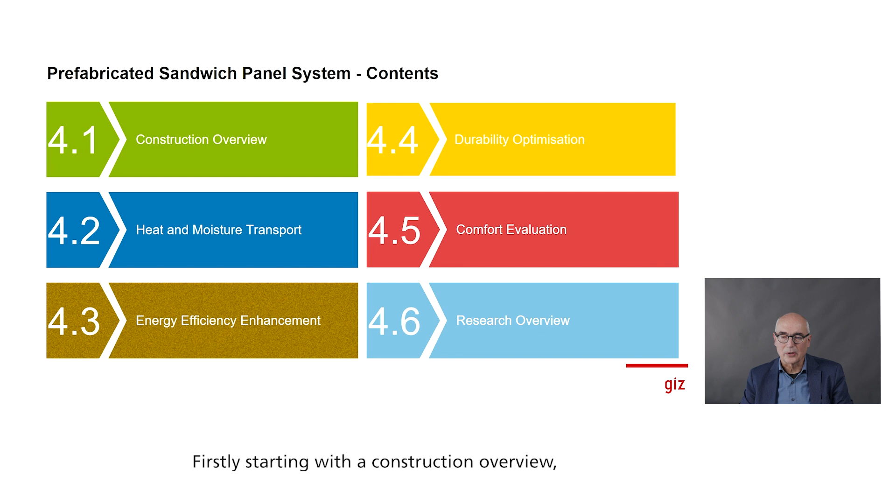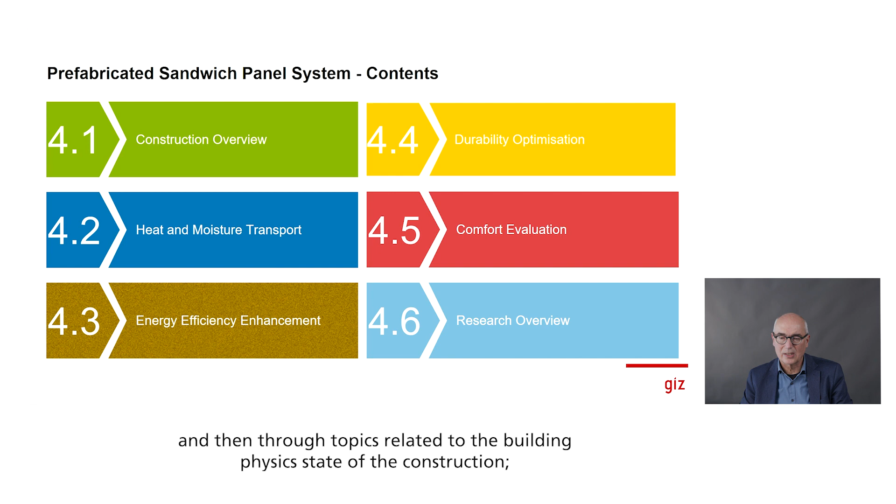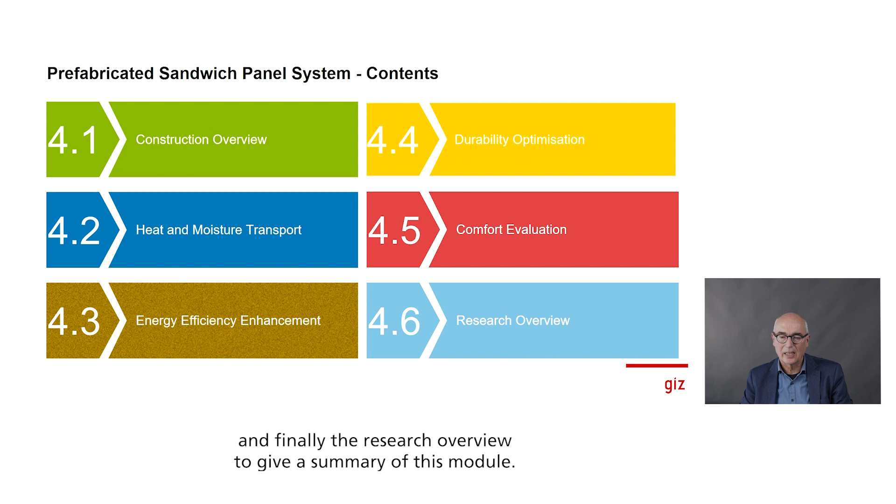Starting with the construction overview to create an understanding of the specific building method being used, and then through topics related to the building physics state of the construction, including heat and moisture transport mechanism, energy efficiency, durability, thermal comfort, and finally the research overview to give a summary of this module.

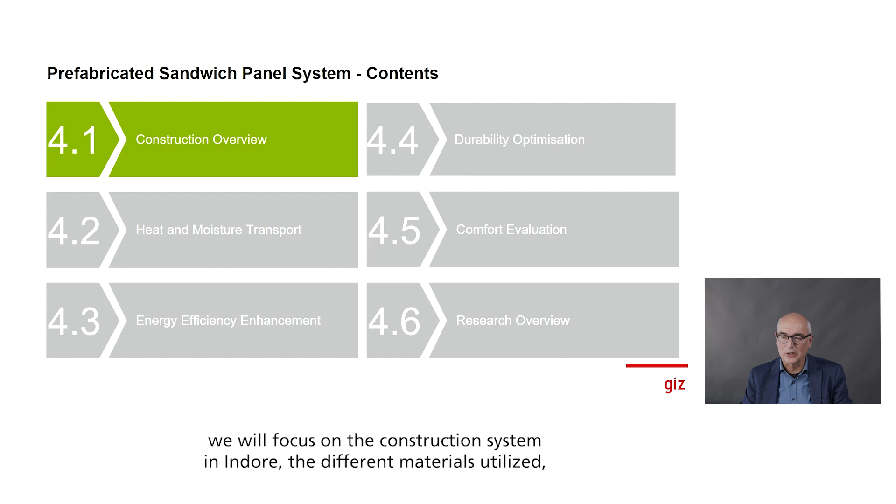As mentioned in the first unit, we will focus on the construction system in INDORE, the different materials utilized, and the construction procedures. We will then explore the building physics challenges that might arise from this type of construction.

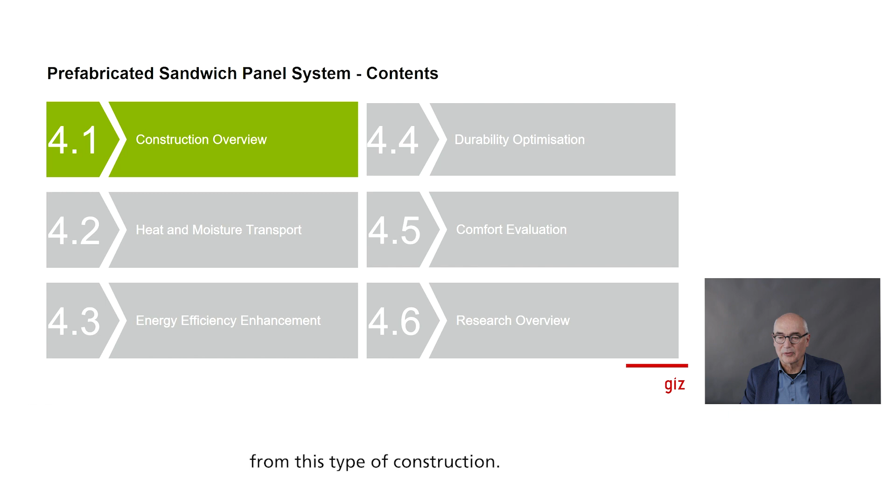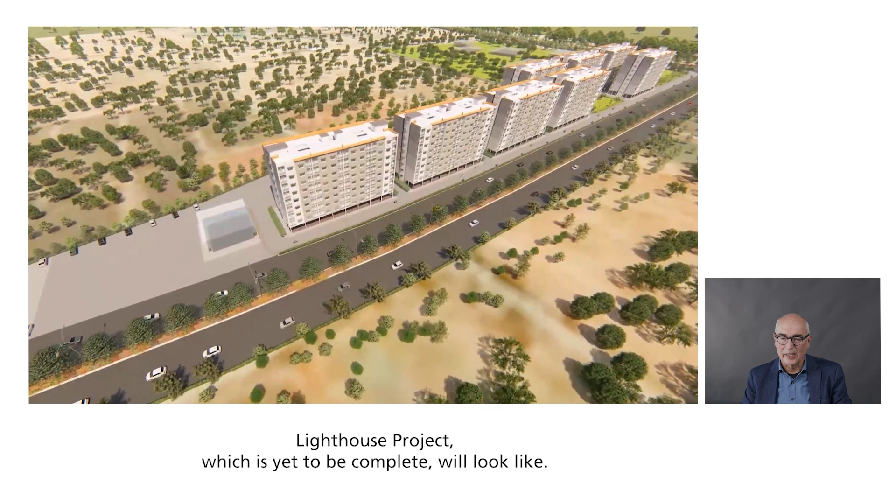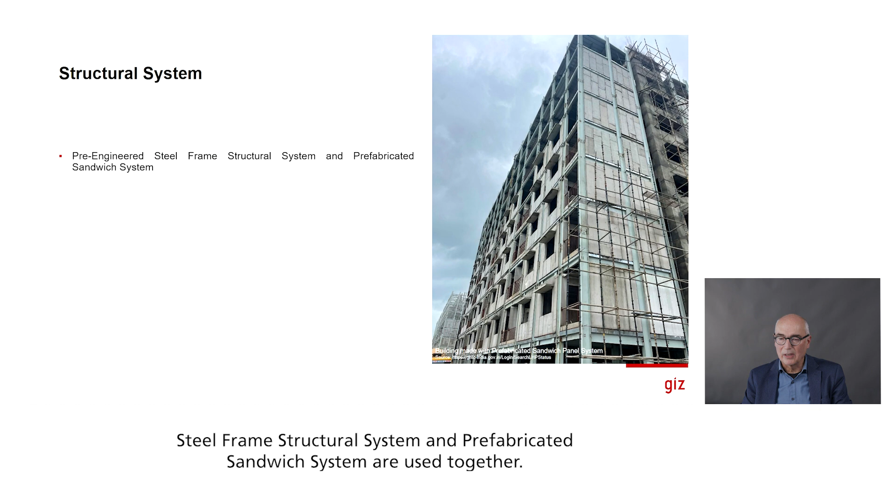This rendering video shows us what INDORE's lighthouse project, which is yet to be complete, will look like. The project is set to contain a total of 1024 flats. The lighthouse project in INDORE utilizes a hybrid structural system where a pre-engineered steel frame structural system and prefabricated sandwich system are used together.

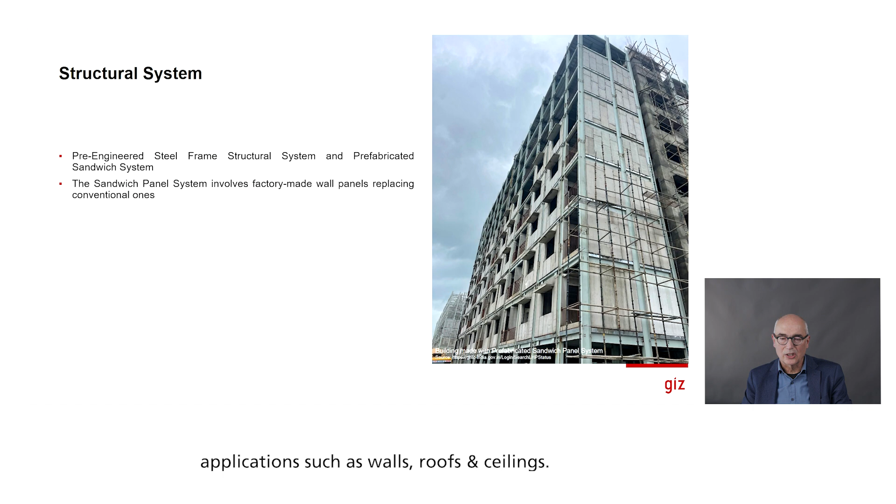The prefabricated sandwich system, as the name suggests, is a system of panels which are manufactured in a factory and can have several applications such as walls, roofs and ceilings. In the INDORE project they are used as a walling system.

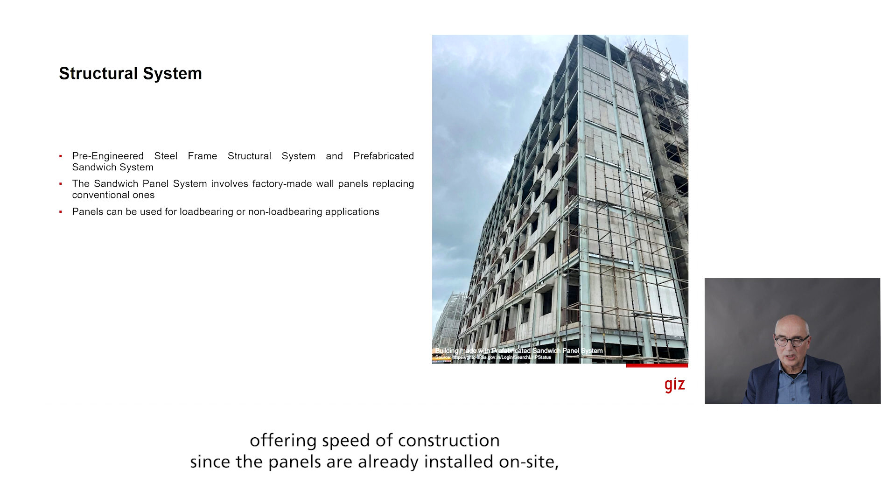This system provides many benefits, offering speed of construction since the panels are already installed on site, as well as water conservation, as no curing of wall components is required.

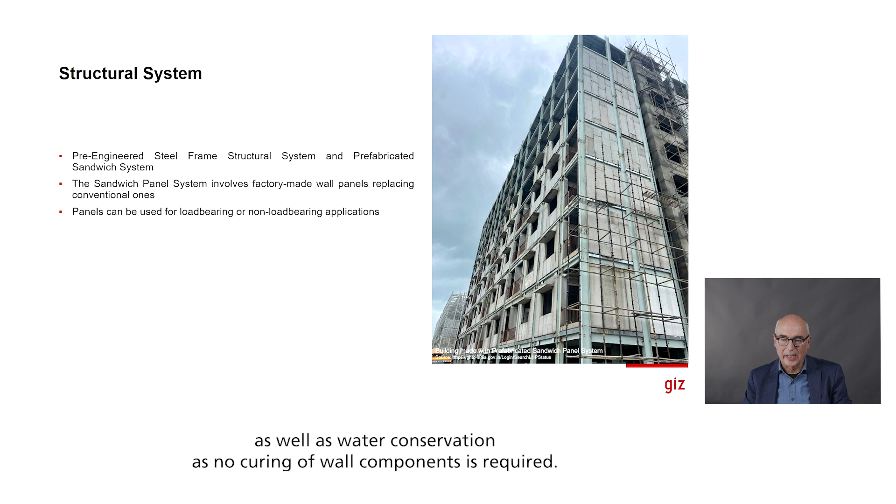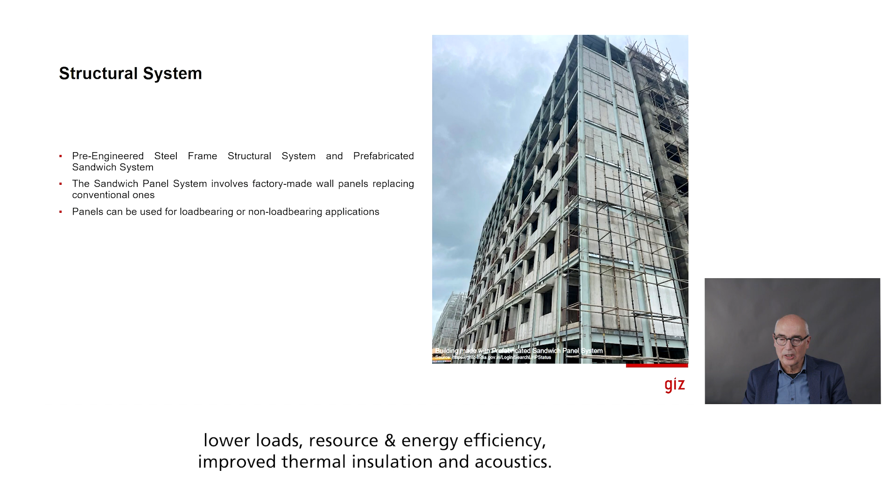A lightweight core material is used in the manufacturing of the panels, providing lower loads, resource and energy efficiency, improved thermal insulation and acoustics. To give a brief introduction of the construction process in this lighthouse project in INDORE, it...

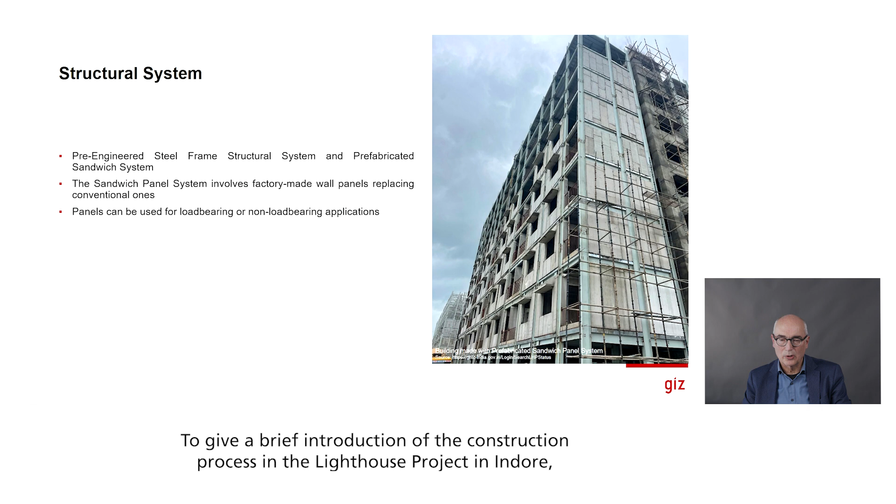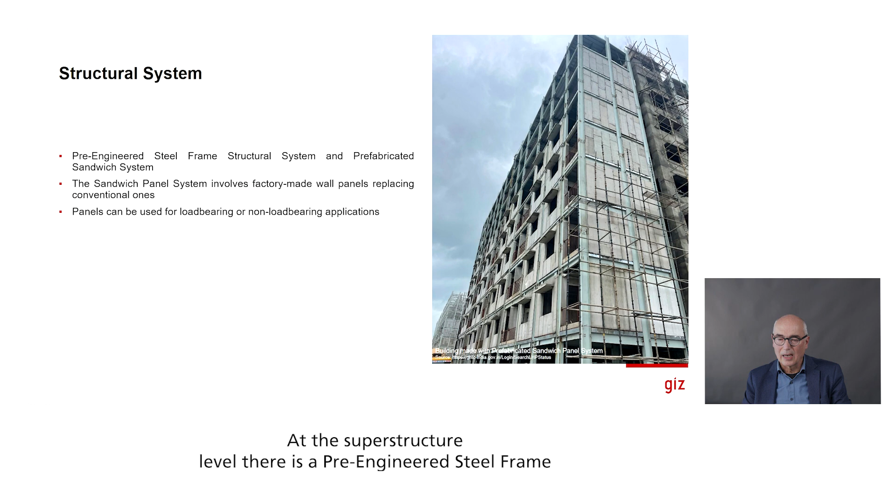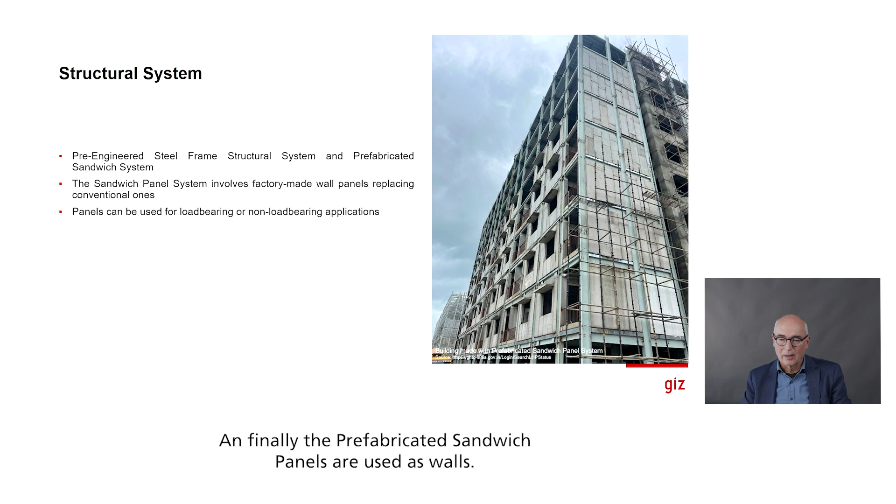involves the use of combined and isolated footings at the substructure level. At the superstructure level there is a pre-engineered steel frame and deck sheets for casting floor roof slabs being used. And finally, the prefabricated sandwich panels are used as walls. The steel frame and the prefabricated wall panels can be seen in this picture.

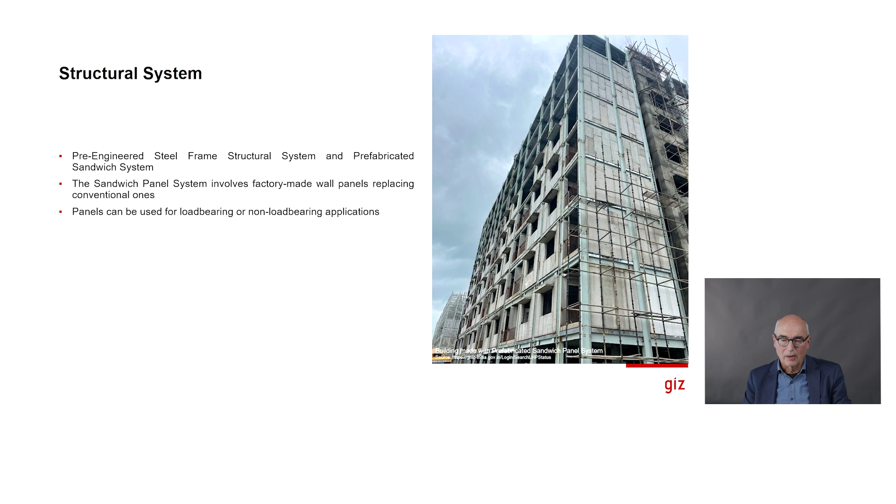The construction procedure will now be explained in detail.

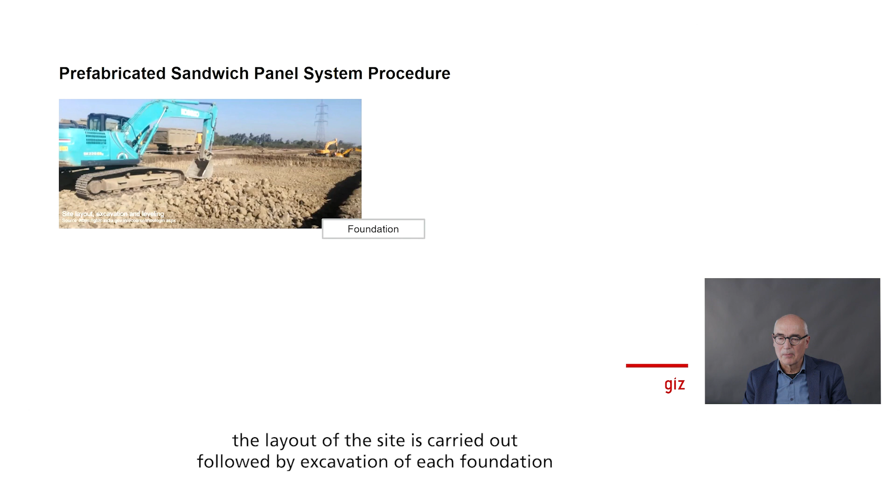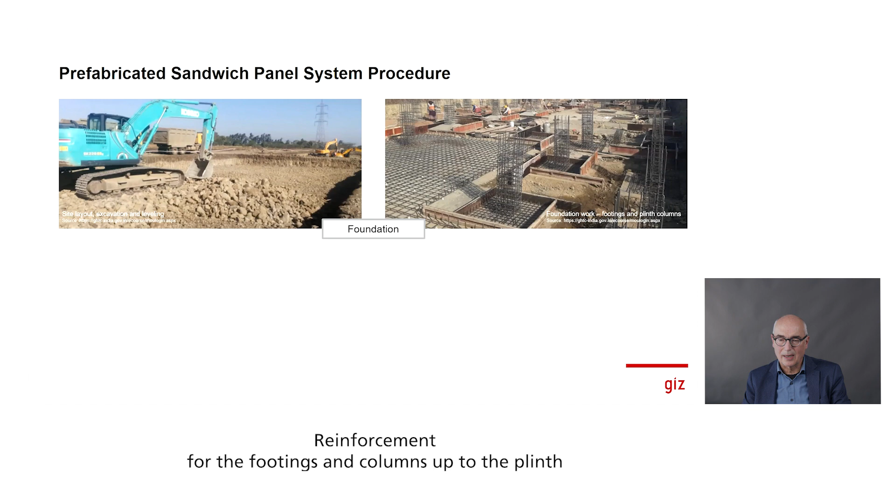Looking at the construction procedure and starting with the substructure. The layout of the site is carried out followed by excavation of each foundation block and leveling by laying plain cement concrete. Reinforcement for the footings and columns up to the plinth level are then placed, after which concreting is...

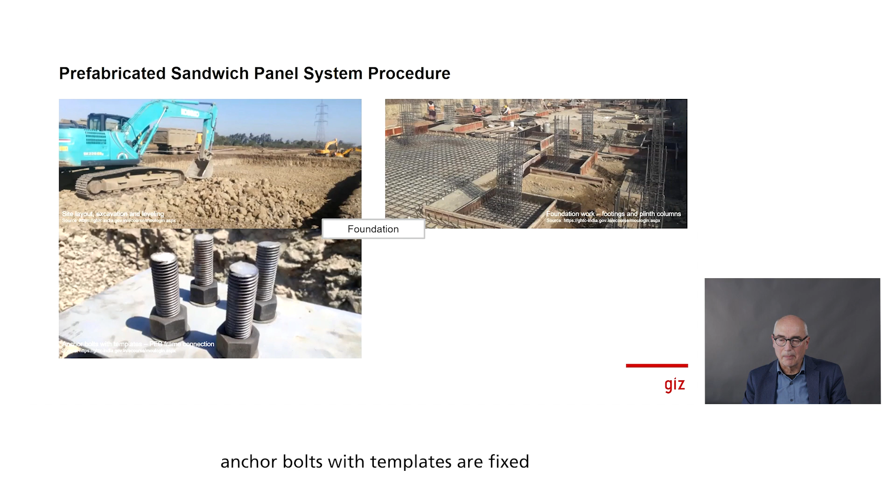carried out. This is followed by backfilling up the plinth, and as can be seen in the picture below, anchor bolts with templates are fixed over the reinforcement of the foundation columns in preparation for the steel frame as it is erected over the plates.

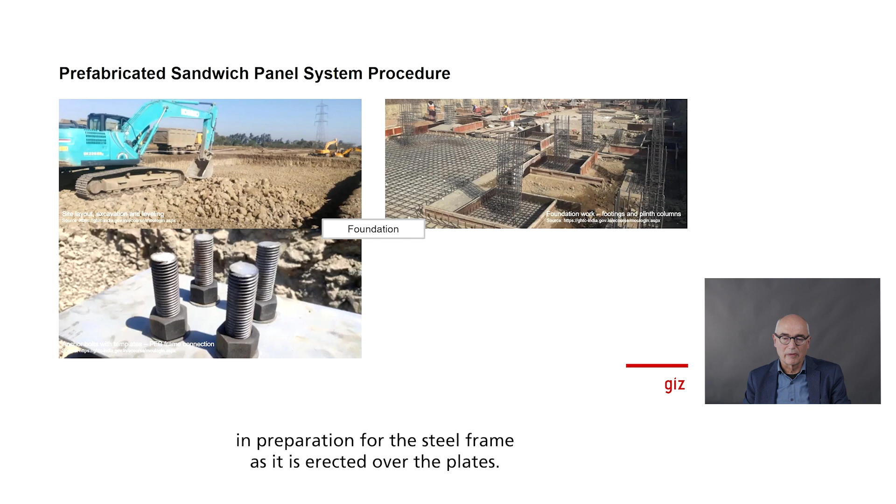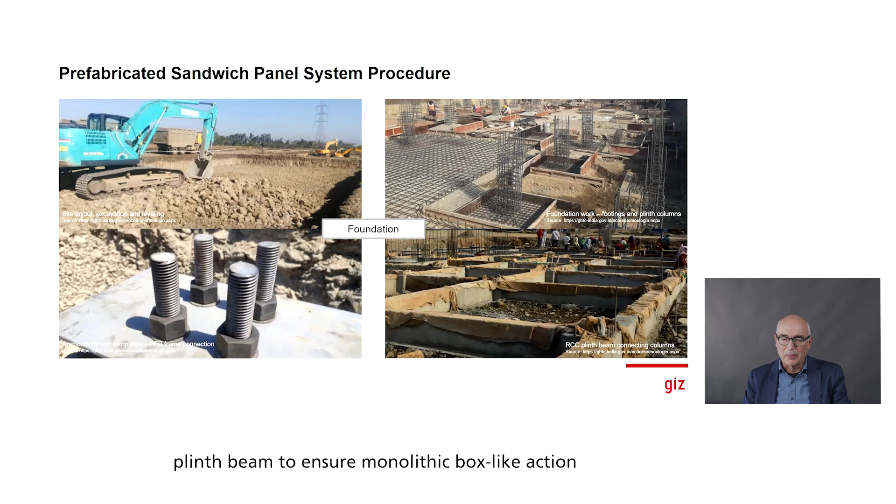Finally, the foundation columns are connected by a reinforced cement concrete plinth beam to ensure monolithic box-like action and seismic resistance.

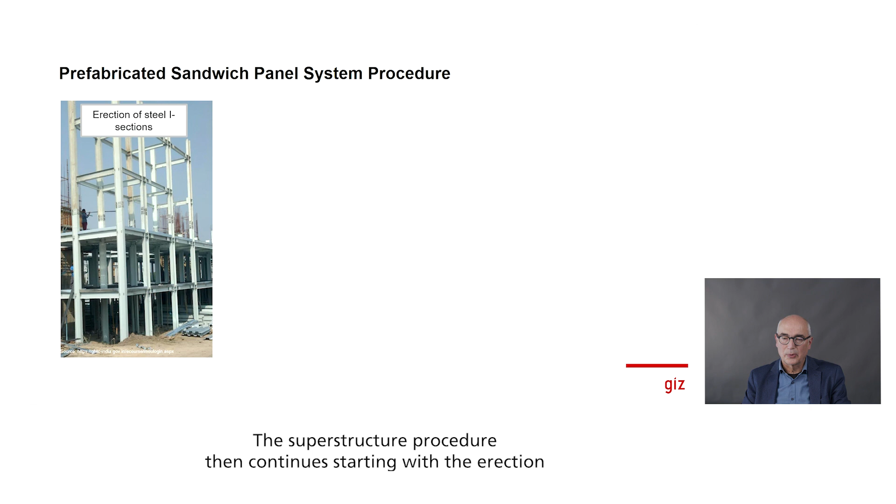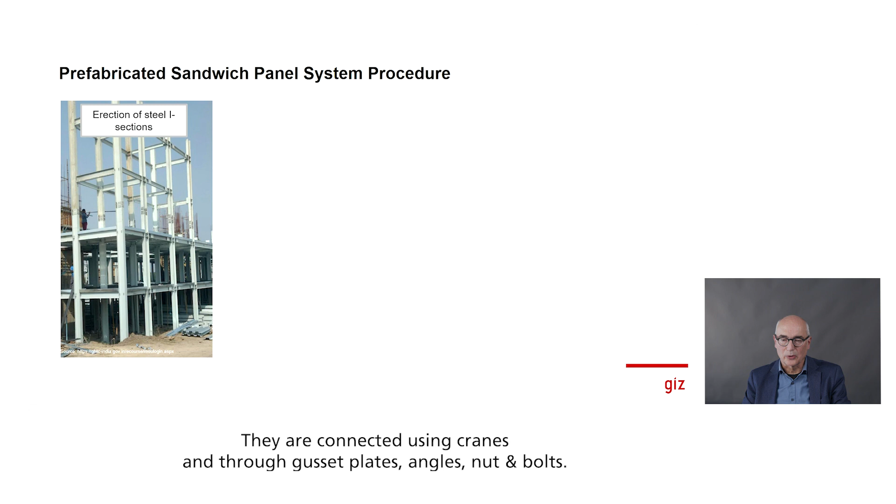The superstructure procedure then continues, starting with the erection of the pre-engineered building system made up of I sections. They are connected using cranes and through gusset plates, angles, nut and bolts.

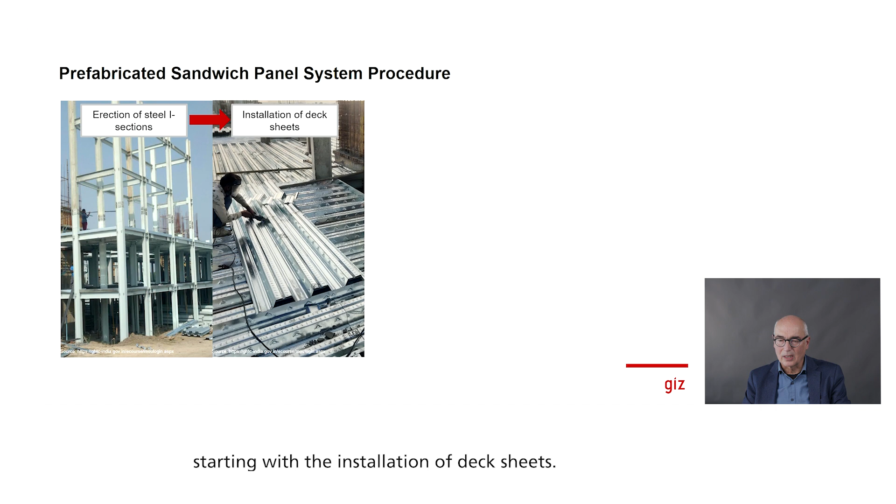Once the frame is set up, the process of deck slabs begins, starting with the installation of deck sheets. This is followed by reinforcement being laid on the sheets and concreting to form the slabs.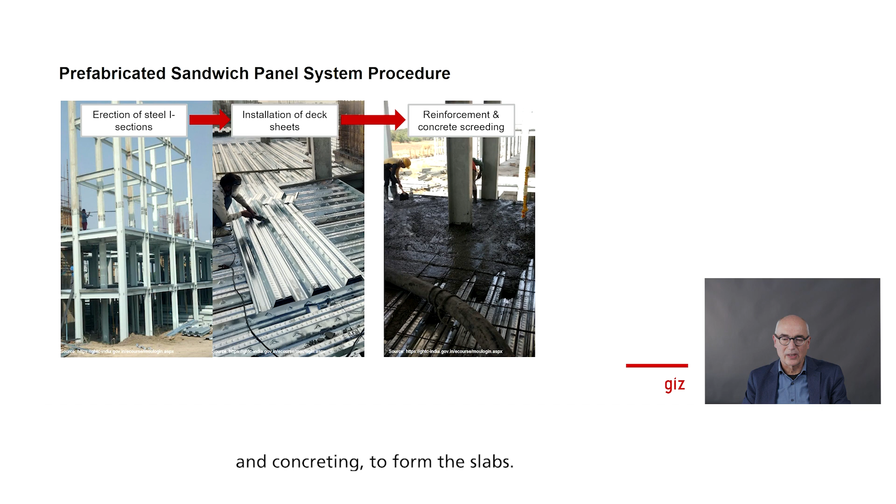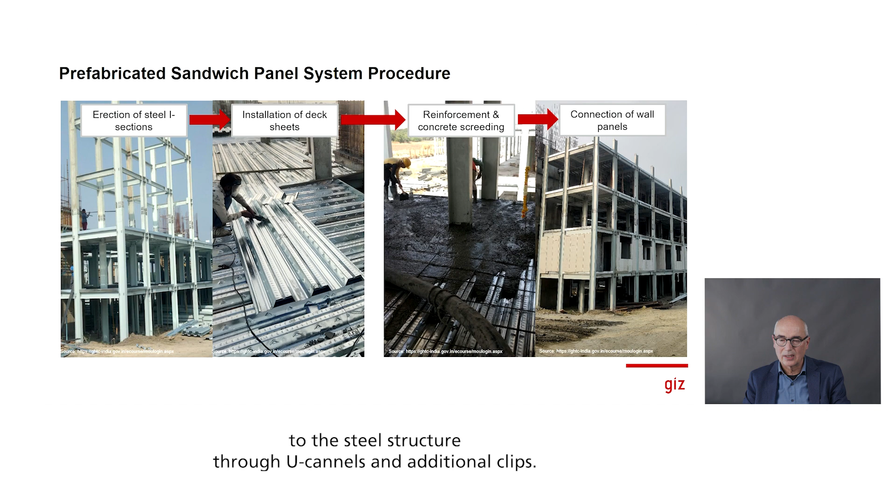Finally, the factory-made wall panels are installed and connected to the steel structure through U-channels and additional clips.

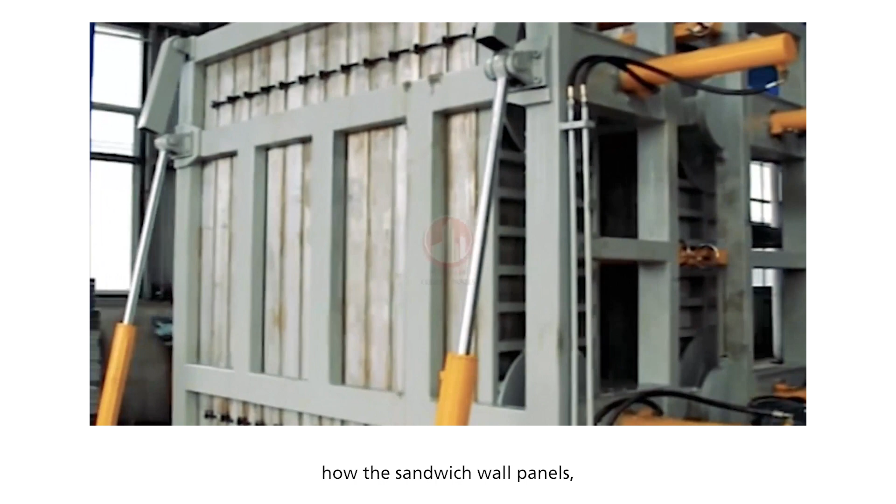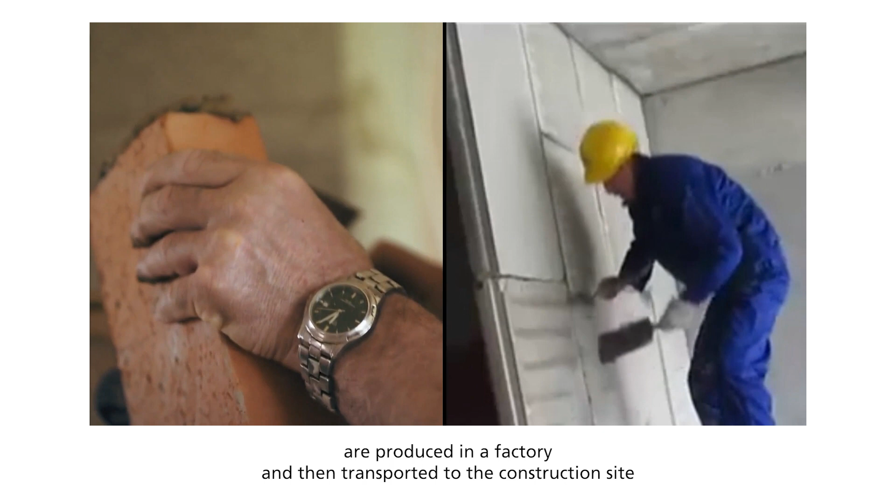In this video we can see how the sandwich panels, which are made of expanded polystyrene cement, are produced in a factory and then transported to the construction site ready for use.

They replace conventional brick and mortar walls and can be used for load-bearing and non-load-bearing applications.

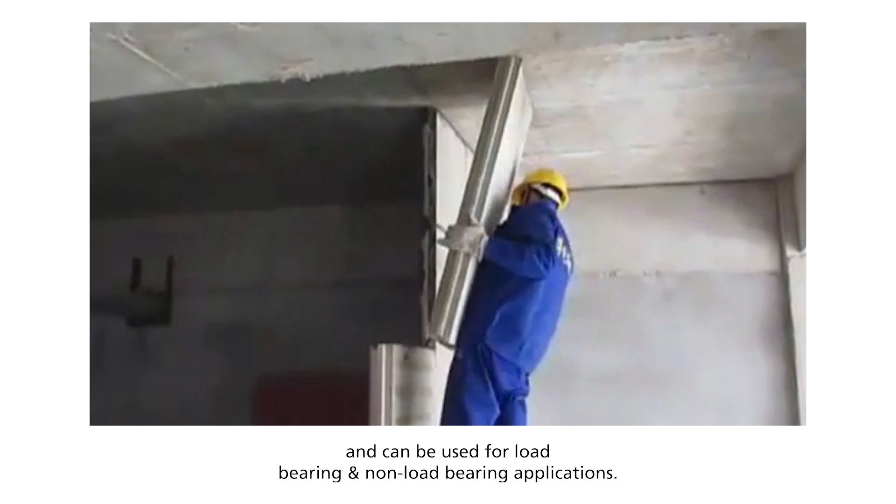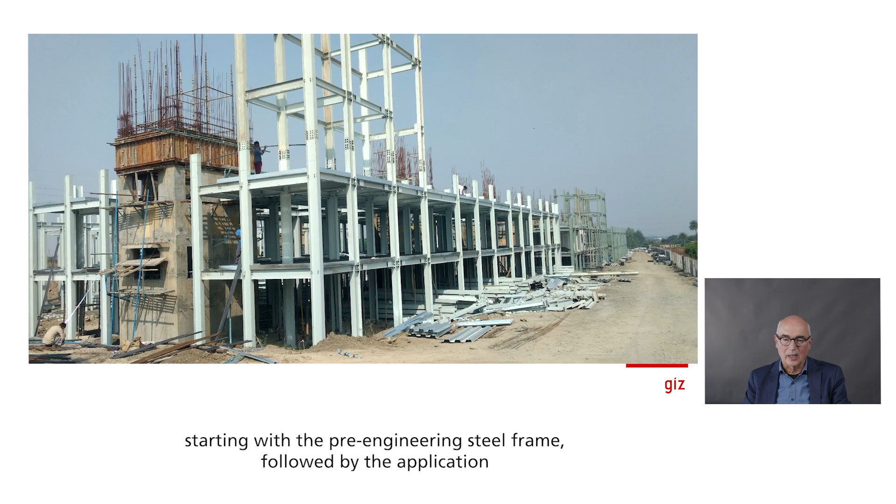In these pictures we can see the development of one of the towers at INDORE, starting with the pre-engineering steel frame, followed by the applications of the building. Here we have a picture showing the floor plan of the INDORE units and pictures from a built unit.

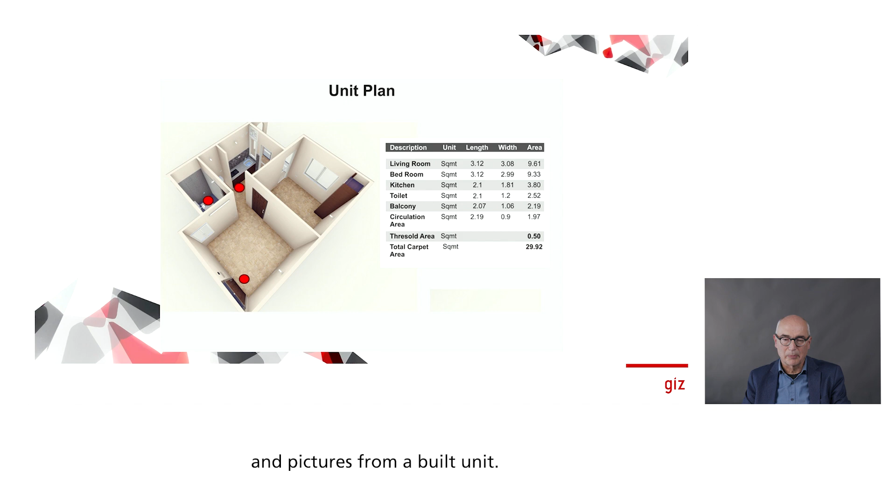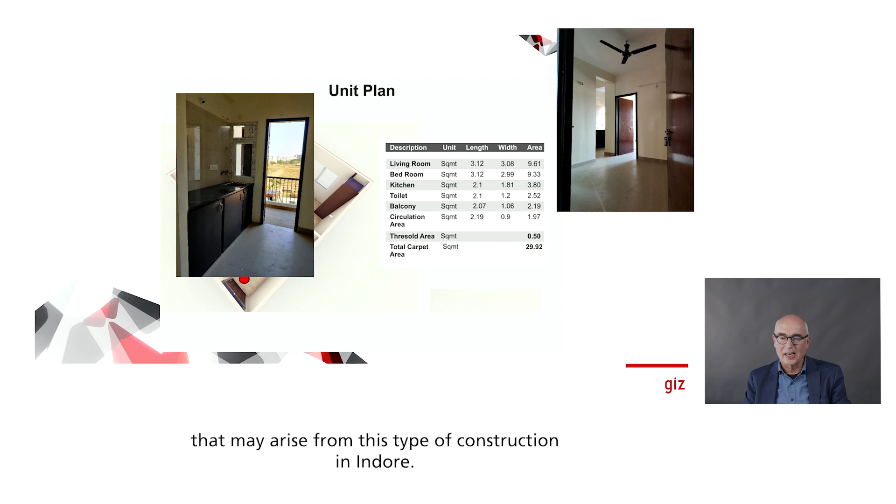We will now briefly explore the building physics challenges that may arise from this type of construction in INDORE.

The construction challenges that exist in INDORE are manifold. Whether it is the evaluation of materials and their physical properties, whether it is the construction method itself, whether it is the climatic conditions in INDORE.

They all have an impact on the heat and moisture transport, on energy efficiency, on durability, or on comfort conditions in these apartments. Within the following submodule, we will address some of these issues and you will learn how to cope with the most pressing of these issues.

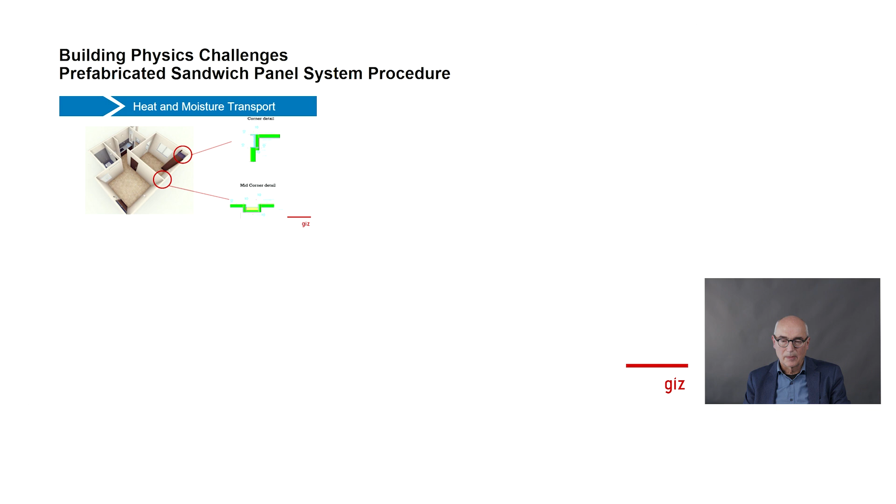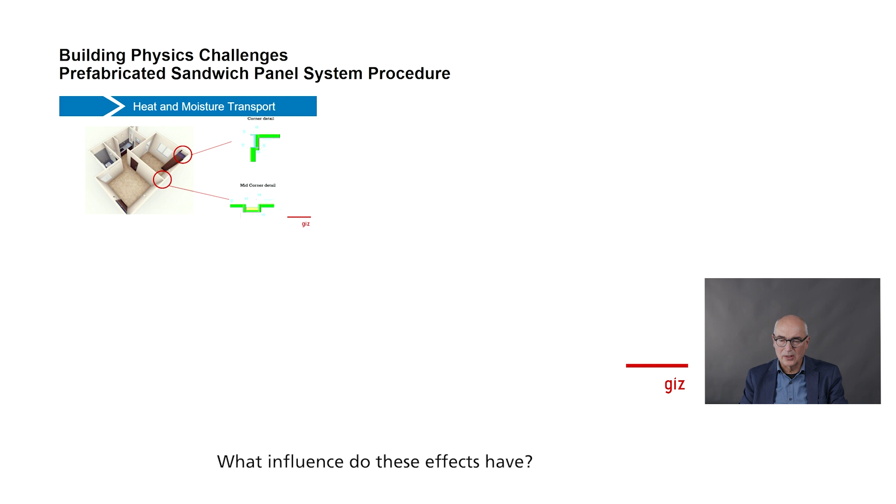In the second lecture, you will learn something about the heat and moisture transport. We will have to take a deeper look at the ventilation calculation and the heat bridge calculation. What influence do these effects have? What happens with the heat transfer and how air infiltrates a building? Since we have material with quite low heat conductivity, we will see the influence of heat bridges and ventilation.

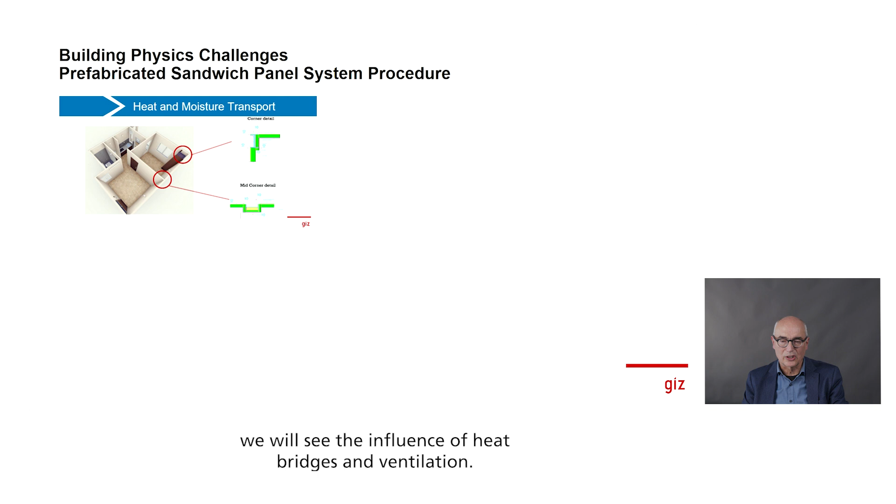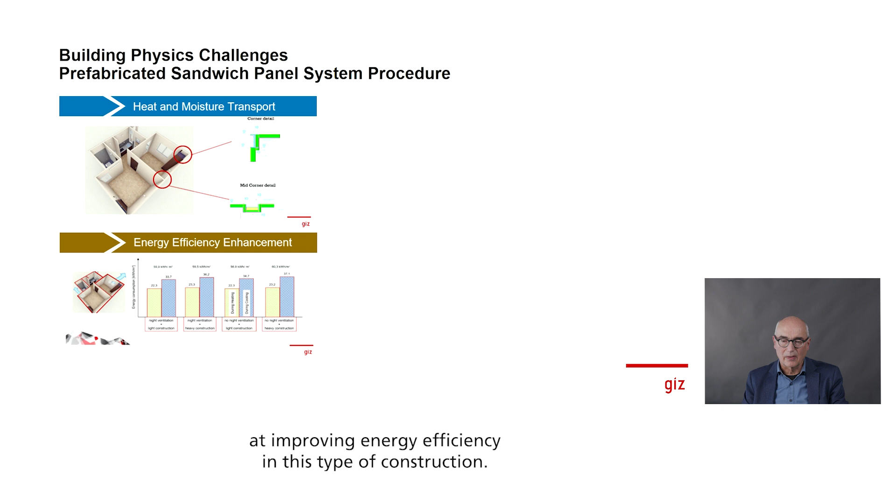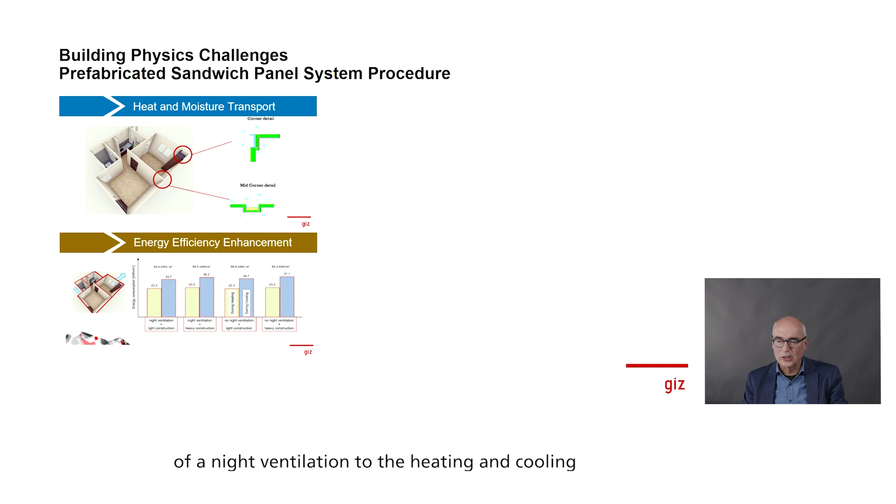In the third submodule, we'll take a deeper look at improving energy efficiency in this type of construction. We'll look at the calculation of the heat transfer through ventilation, as well as the influence of a night ventilation to the heating and cooling demand of one flat in INDORE.

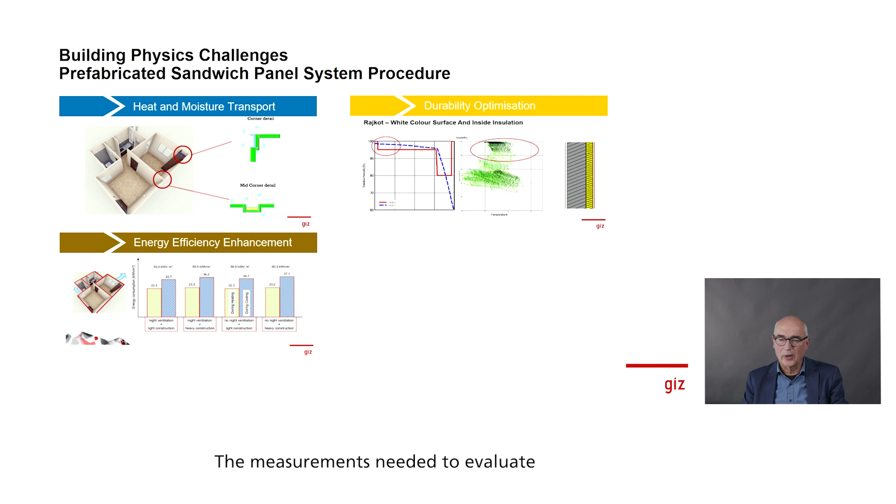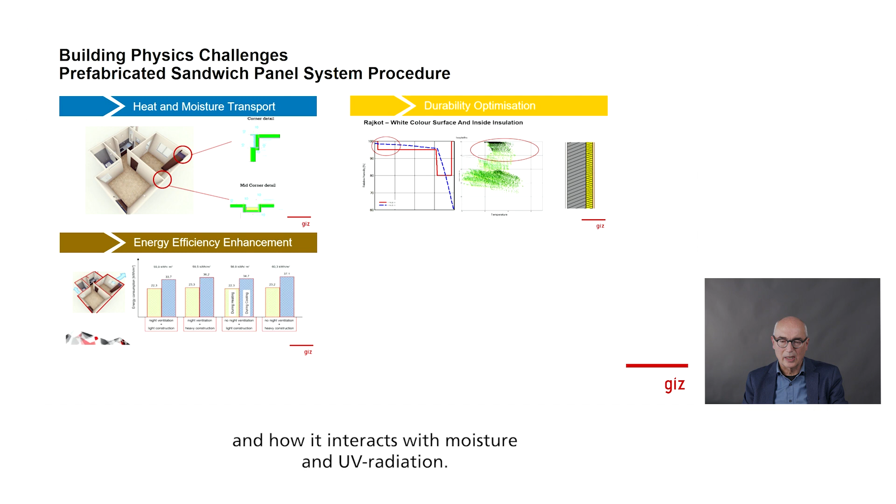The measurements needed to evaluate the durability of materials is the topic of the fourth lecture of this module. We will have a look at the special material used in INDORE and how it interacts with moisture and UV radiation. Moreover, you will see how these measurements are performed in an outdoor testing center.

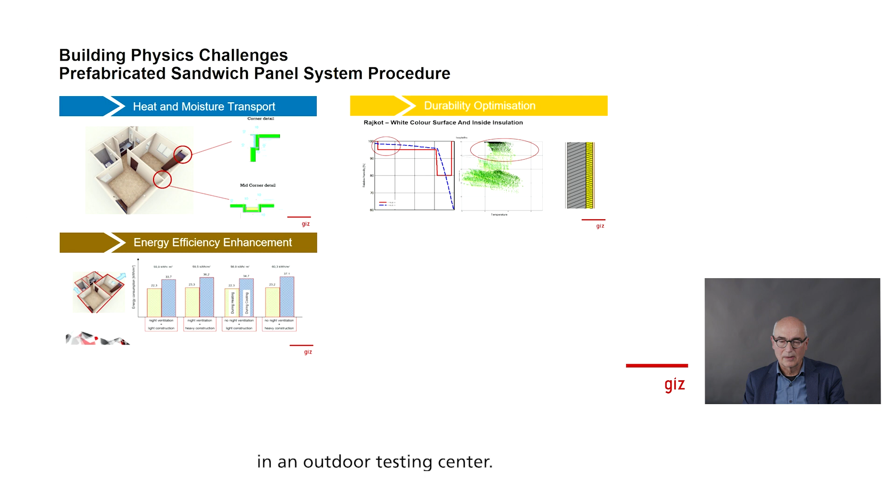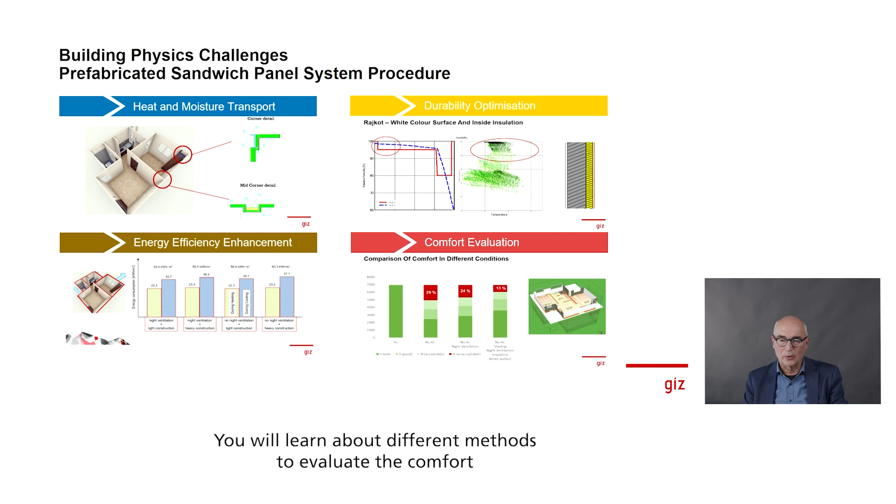Comfort conditions in the flat are the topic of the fifth lecture. You will learn about different methods to evaluate the comfort, looking at one possibility to evaluate the perceived comfort using the PPD and the PMV scale.

In the last video, we will have a look at the current research. Many materials are used and producers declare them as sustainable, but how do we evaluate this? We don't know. This will be the topic of the last lecture of this module.

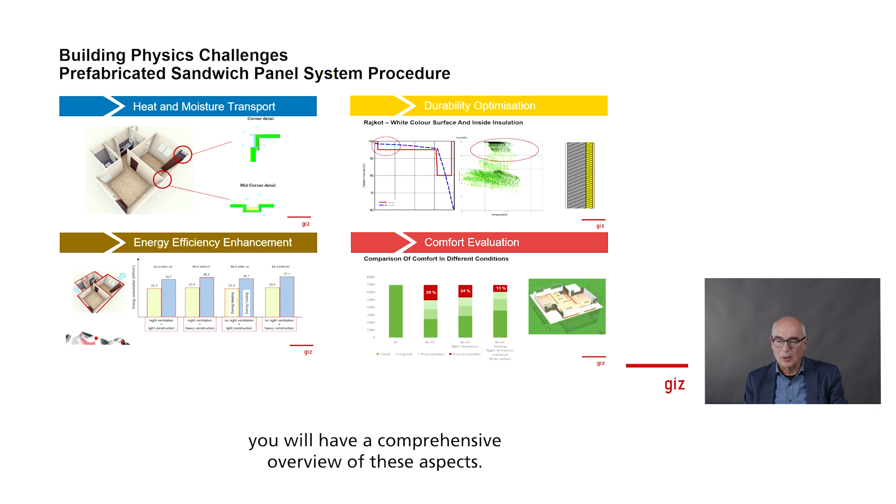Going through this module, you will have a comprehensive overview of these aspects.